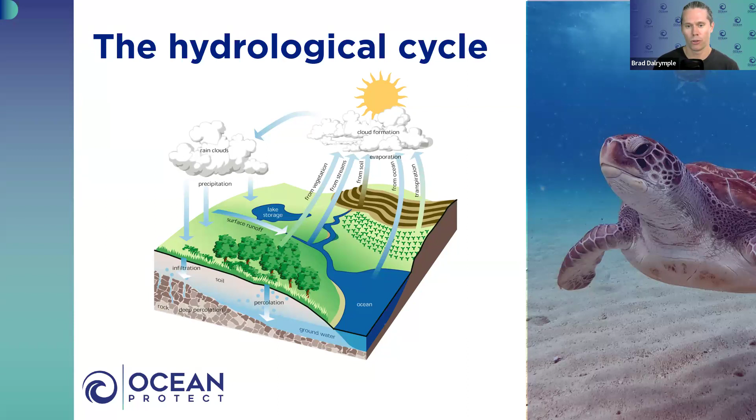And also in a forested catchment, we don't actually get much in the way of surface runoff. We need a lot of rainfall to generate any surface runoff in a forested environment, which is very different to urban areas. And I'll come to that very shortly. But obviously, depending on where you are in a catchment, the waterway will often be different. So in the upper reaches of the catchment, we have gullies and small creeks, etc. And towards the end of the catchment, we have obviously estuaries and marine environments, and they operate very differently.

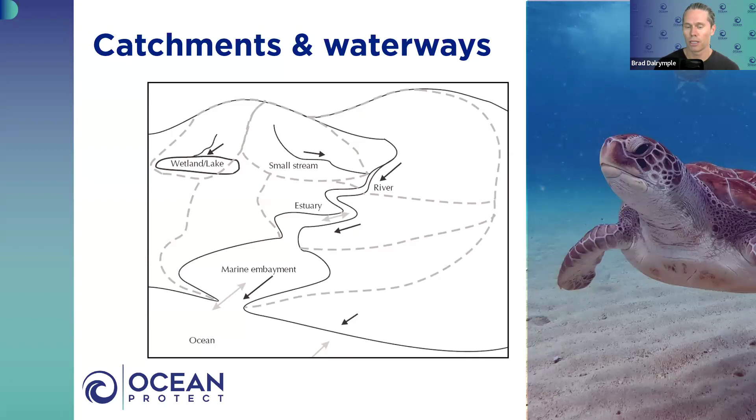Smaller creeks with smaller catchments are obviously far more sensitive to any sort of change. But the downstream environments near estuaries, etc., have what we call tidal flushing, or essentially are a lot less susceptible or a lot less sensitive to land use change.

To give you an idea, this is a model result infographic from my old employer, BMT WBM, back in the day. This is going back a few years now. It basically shows a sediment plume coming from a large catchment in southeast Queensland and entering into the downstream bay environment. And you can see the brown, which is the sediment plume coming from the catchment.

You can see the upper waterways, obviously much more sensitive, that you get a spike of turbidity in this case, but the estuarine environment has what we call tidal flushing, so the action of the tide going up and down basically acts to flush a lot of that pollution out of the system, typically replacing that potentially contaminated water with cleaner water.

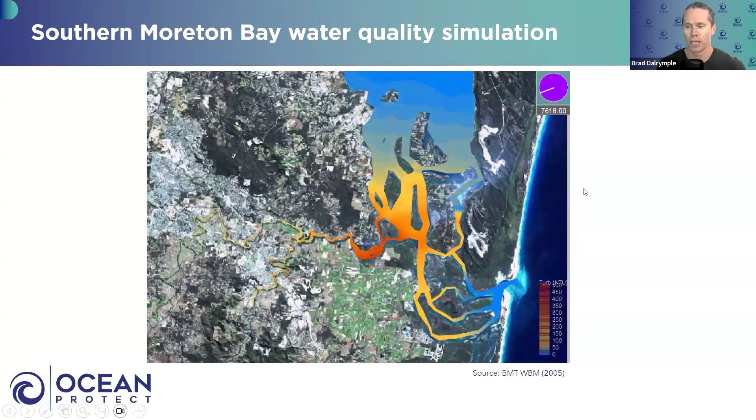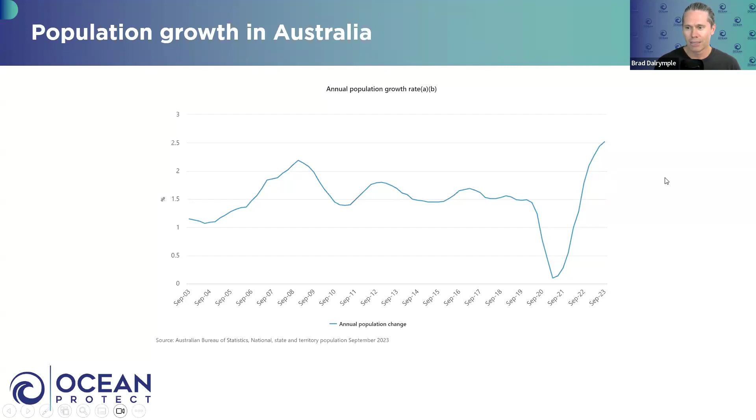So diving straight into it, let's talk about urbanisation. So fundamentally, we've got a lot of people coming to Australia, and why not? It's a beautiful part of the world. But the population growth is pretty significant. What's that, about 1.5%, 2.5% per year? Obviously, COVID was a little bit of an exception, but we've got a lot of people coming to Australia, particularly in certain parts of Australia. So where I'm based in southeast Queensland, a lot of people are coming to southeast Queensland.

So that urbanisation, okay, it's happening. So what are the key catchment or land usage changes associated with that urbanisation? For me, these are the key ones: vegetation loss, increased imperviousness, increased hydraulic efficiency, and pollution.

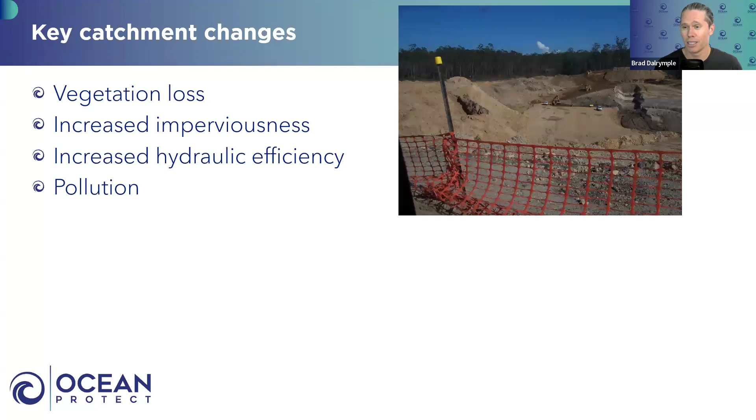So these are some happy snaps taken over the years. The top photo shows basically land being cleared. This is out at Springfield Lakes, probably a decade or so ago now, at least. And that's basically being progressively built out with a whole bunch of roads, houses, etc., which obviously changes the dynamics of the catchment hydrology.

And also something that's often forgotten about. Often we can't do much readily, or at least practically, when it comes to decreasing imperviousness. But certainly one of the things that we do see with urban environments, at least traditionally, is this increased hydraulic efficiency. So there's a real desire or objective to just get stormwater away as quickly and efficiently as possible. I'll come to that a little bit later.

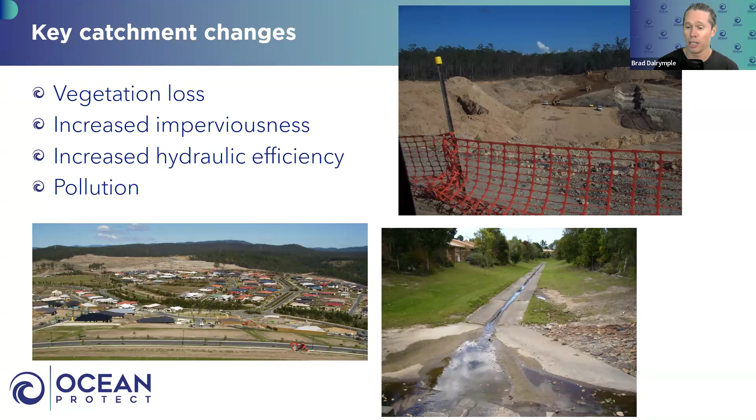And also we get increased pollutant loads, higher concentrations of pollutants, but also pollutants that just wouldn't otherwise appear in a natural catchment. Very quickly on these impervious areas, the key ones are roofs, roads, driveways, etc. Particularly roads. Roads are a major part of the imperviousness of a catchment. You can see here, back in the day, and I think it's probably worse now, some areas have up to 70% of the impervious areas of an urban environment dedicated to just cars, basically.

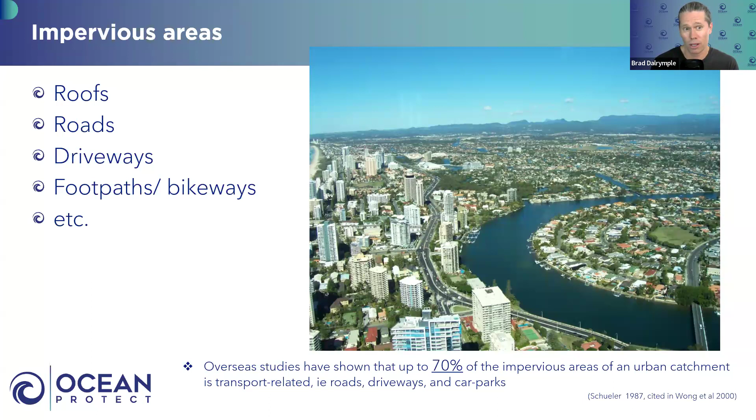So we're a long way off flying cars, but in the meantime, we've got a massive issue with increased imperviousness. What does that actually mean, though, that increased imperviousness and vegetation loss? Fundamentally, from a hydrological perspective, and that's what we're here to talk about when it comes to stormwater, we see reduced rainfall interception, reduced runoff interception, reduced infiltration, so less water soaking into the ground, more runoff being generated. And generally, runoff is transported much more quickly and more intensely into our waterways.

But fundamentally, you don't need much rainfall in an urban environment to generate runoff. You generally need at least 25 mils or thereabouts to generate any surface runoff in a forested environment. But when it comes to an urban environment, you only need 1 or 2 millimeters to start generating runoff. So fundamentally, we see more volume and more frequent runoff events in an urbanized environment relative to a forested environment.

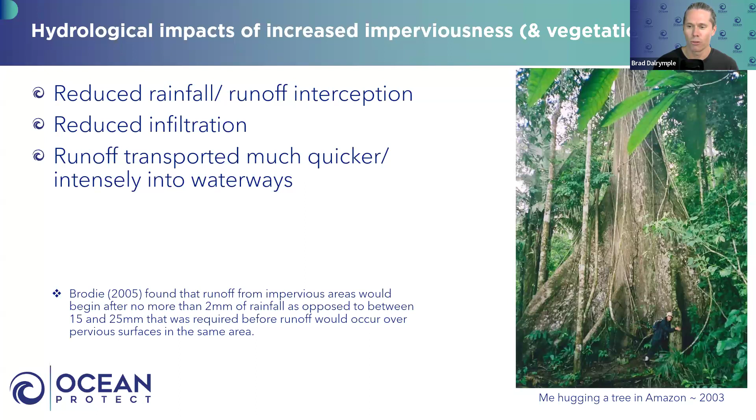So let's talk about that now. I'm keen to talk about water quantity now. So stormwater quantity, and very quickly talking about the elements of the traditional stormwater management system. Traditionally, stormwater engineers have been all about trying to get that stormwater away as quickly and efficiently as possible, generally focused very much on flood protection. So protecting people and property from big events, the Q100 events, the Q50, Q20, stuff that can cause some dramas.

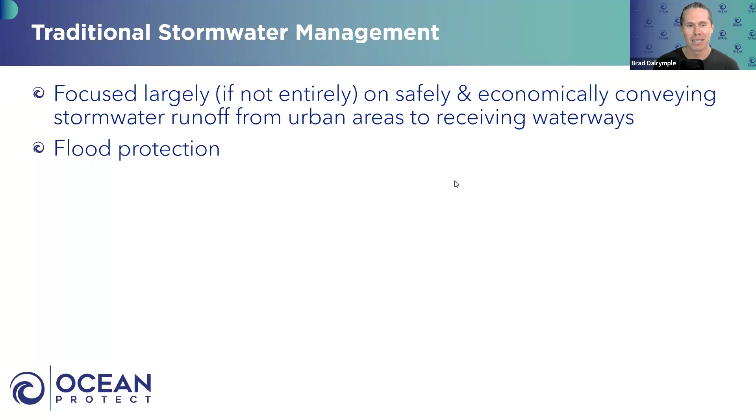But fundamentally in Australia, we generally have what are considered, in inverted commas, separate stormwater and wastewater. So our wastewater system or sewage infrastructure is handling the toilets, the bathrooms, kitchen sinks, laundry, etc., and there's a separate set of pipes for stormwater runoff. And I use that term separate in inverted commas, because often there's cross contamination. Often stormwater will discharge or leak or infiltrate into wastewater. Equally, wastewater can often go into stormwater, whether it be through illegal connections or whatever, so often they aren't necessarily separate as such.

It's a bit different in other parts of the world, including the UK. When I was in the UK as a sewage engineer back in the day, one of my jobs was to investigate sewage flooding into people's houses. In the UK, they often have cellars and other low-lying buildings. And because they've got this combined system, if the sewage has got nowhere to go in a storm event, it'll rise up into people's properties, which is a whole bunch of drama. And that's a story for another day.

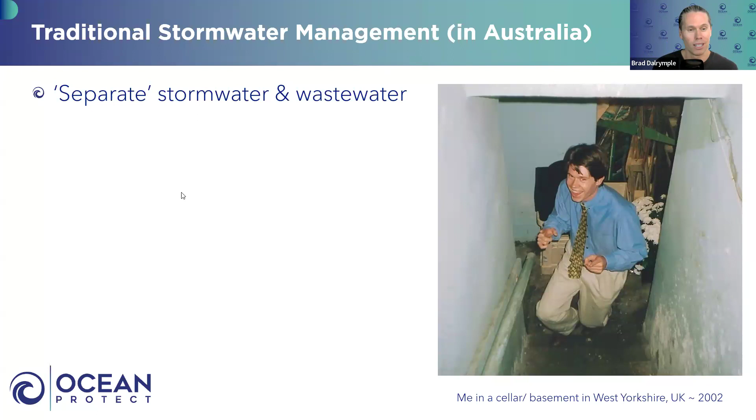But yeah, typical elements of a traditional stormwater management system are really just about getting that water away as quickly as possible. So kerb-side channels and pits, pipes, which I know Sean Quilty has done 3 webinars on as part of this fundamental series already. And then open channels, whether they're overland flows or big concrete drains, and often detention basins to try and handle or detain those big infrequent Q50, Q100 storm events. So most of the elements are about getting the water away from people and property as quickly and efficiently as possible.

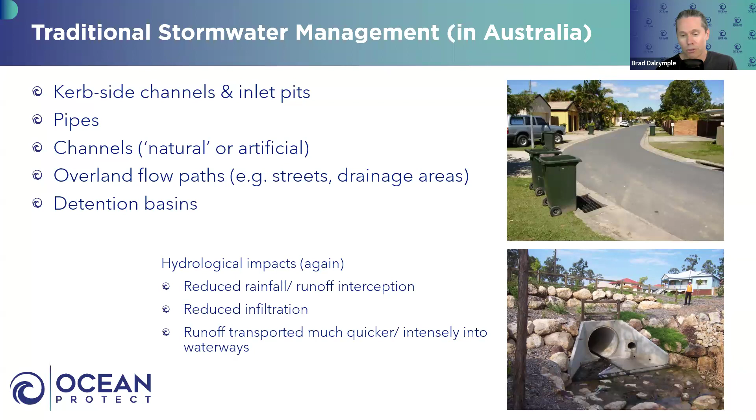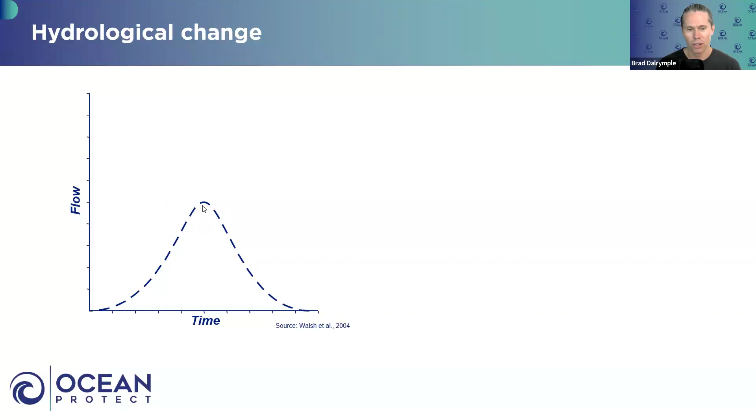So again, the hydrological impacts of that are more or less the same as getting rid of trees and putting down imperviousness. Reduced rainfall runoff and interception, reduced infiltration, and again, water's got a lot more energy going into our waterways. And you've probably seen a graph like this before. I won't dwell on it too much, but you've got a relationship here between flow and time. After a rainfall event, you might get a peak of the flow here, and this might be, say, before urbanisation.

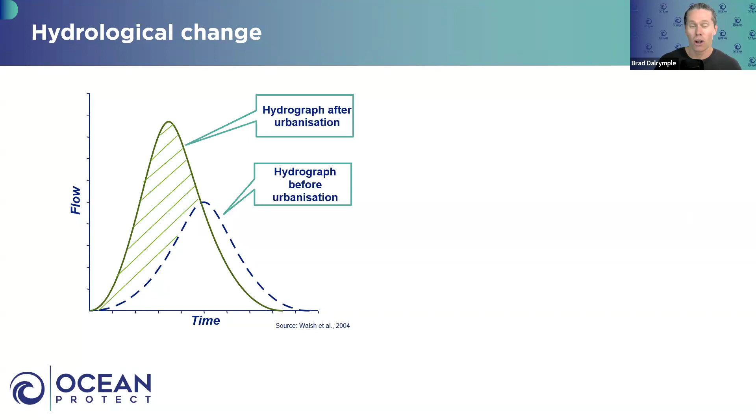But when you urbanize a catchment, it very much changes the hydrograph for any particular rainfall event. Generally, you get a higher peak flow rate. So the peak here is much higher than the peak for pre-urbanisation. Also, the hydrograph peak actually occurs sooner. You can see here the time it takes to get to this peak post-urbanization is much faster because of that increased imperviousness, hydraulic efficiency, etc.

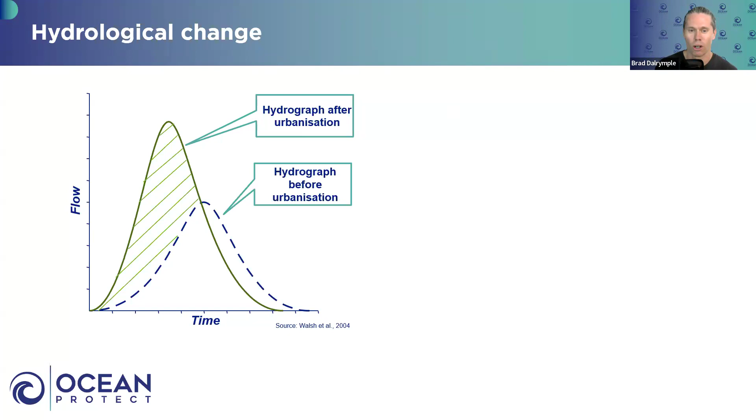And also the volume of runoff. The volume of flow, the area underneath the graph, is obviously bigger post-urbanization. And imagine that is the case every time it rains. So again, decreased time to peak flow, increased flow rate, and also increased flow volume, which obviously has big impacts on the health of our waterways.

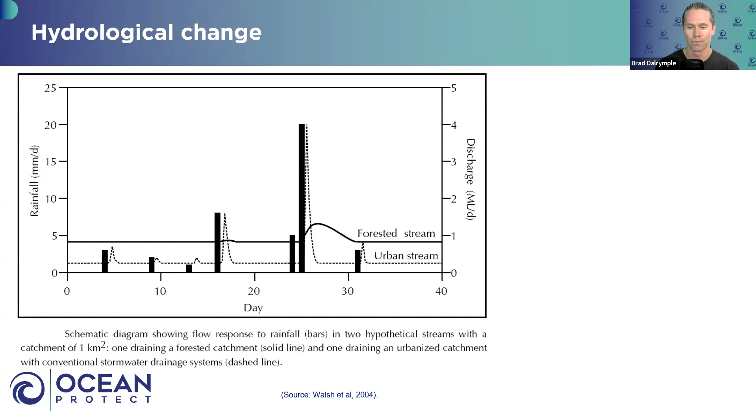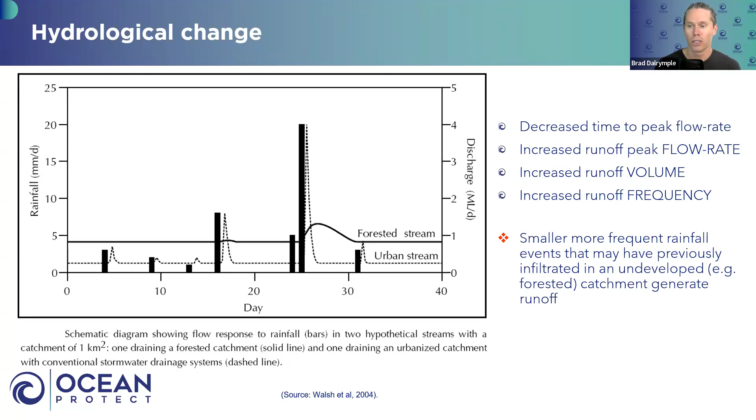So again, key changes illustrated here: with urbanization, you get decreased time to peak flow, increased peak flow rate, increased flow volume, and increased runoff frequency, particularly for the smaller, more frequent rainfall events that previously caused no runoff in a forested environment. And that, for me, is key. I'll get to that shortly.

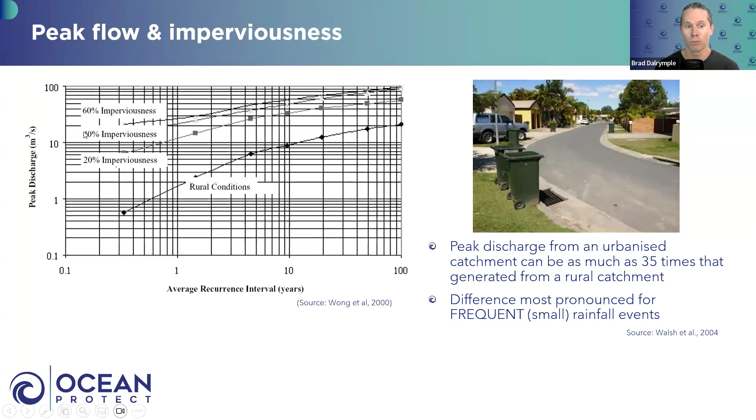This is a bit of a complicated graph. It basically just shows that the impact to peak flow rates is far more severe when it comes to imperviousness for the smaller, more frequent rainfall events. For the big events, the Q100s, the Q50s, yeah, there is a change between impervious versus non-impervious, but the bigger change between flow rates is observed in the smaller, more frequent rainfall events.

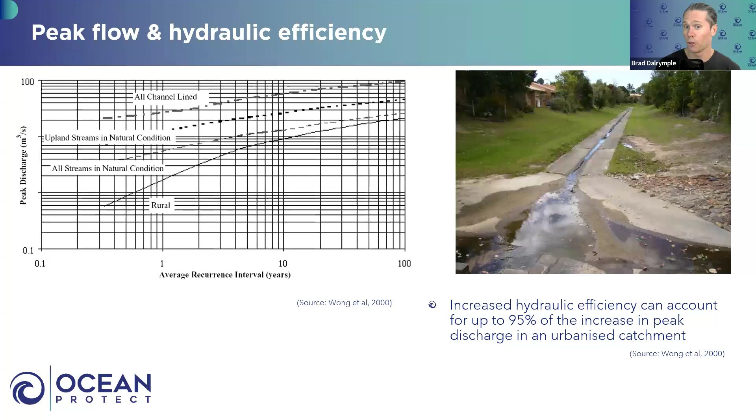So that's water quantity; crash course in water quality now. So stormwater becomes polluted, basically. There's a bunch of processes, but fundamentally you get a buildup of pollution, and when rain falls, it often just washes that pollution off. There's a whole bunch of things going on here, but you can get deposition from the atmosphere. You can get pollution being generated or blown by wind, or people accidentally or deliberately putting the pollution there. And there's a whole bunch of variables there.

And again, on wash off, rain falls, it can often wash contamination even out of the atmosphere, but also it can wash off that pollution from ground surfaces into downstream waterways, or into the stormwater at least. And we often try and simplify this with our fancy modeling packages. It's very much a simplification, but you generally see some sort of first flush happening. So the higher pollutant concentrations being generated in the early stages of a flow event or a rainfall event. Now, we try and simplify that with our models by using event mean concentrations, but fundamentally, we do see a first flush effect, at least on a small scale.

When you look at a catchment or a waterway at a large scale, often first flushes from one part of the catchment will be diluted by other flow from other parts of the catchment. But certainly, the closer you are to the source of pollution being generated, you do see this increase in pollutant concentrations in the early stages of a storm event, which again, for me, highlights the fact that we really should be targeting pollution treatment or mitigation at the source as a priority, which is often forgotten about.

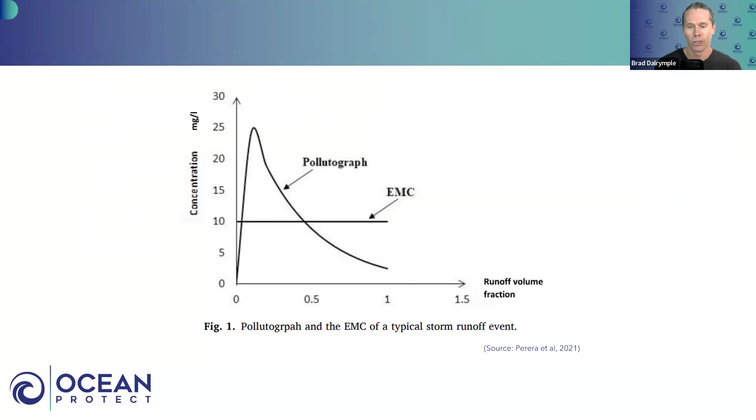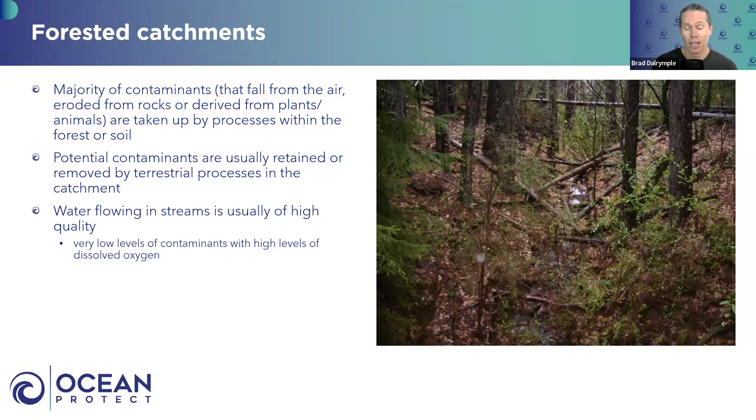But yeah, look, talking about forested catchments again, in forested catchments the waterways are generally pretty healthy. So most of any pollution or contamination that might be generated or accumulated in the forest is generally retained within the forest. So water quality in forested waterways is generally pretty good. Generally low levels of contamination and high levels of dissolved oxygen.

Urbanisation, though, very much changes that. We see an increase in the amount of contamination. Not to say forested catchments are free of contamination, but we certainly see an increase in contamination generally in urbanized environments, but also urban development or just basically people and property in general. We introduce a whole bunch of potentially toxic contaminants that just wouldn't appear in a forested environment, like Big Mac wrappers and single-use bottles and cigarette butts. No koalas are hanging in the eucalyptus trees, smoking any durries. But yeah, certainly urbanisation changes that.

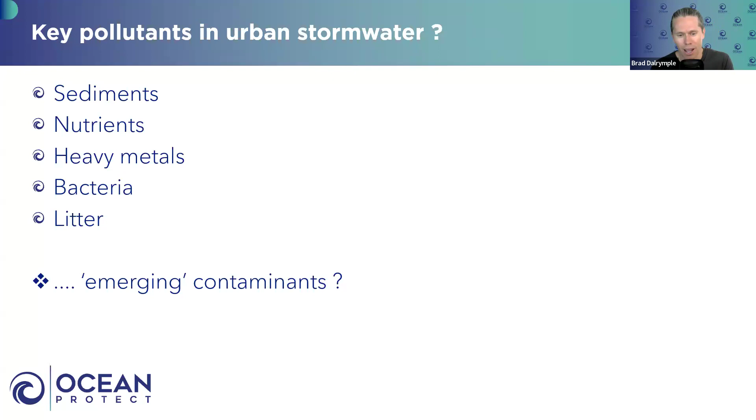These are the key pollutants that we generally talk about when it comes to urban stormwater. So sediments, nutrients, heavy metals, bacteria, litter, etc. And I'm gonna touch on those briefly now, but I'm going to talk about emerging contaminants as well.

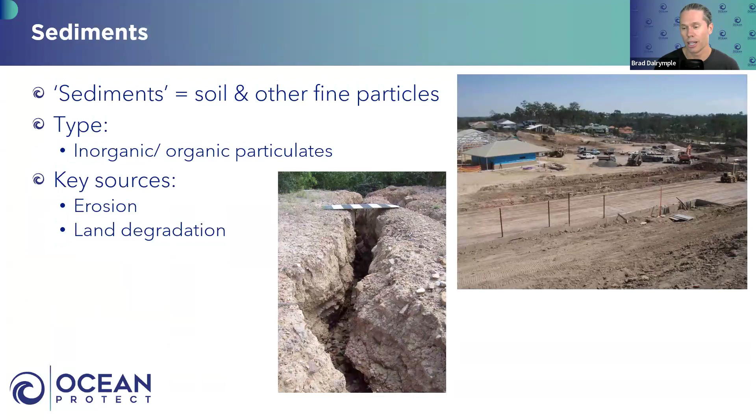40% of construction sites are still non-compliant, i.e. operating illegally when it comes to just basic erosion sediment control practices. And as a result, we see a lot of mud going into our waterways. But like I said, even in an urban environment, you still get a lot of solids, particulate matter being generated and high concentrations in urban stormwater runoff.

Nutrients, generally we're talking about nitrogen and phosphorus, and this comes from a whole bunch of sources. Again, dirt, so you get a lot of particulate bound nutrients in addition to dissolved. But yeah, roads, sewage, detergents, fertilizers, etc. They're all key sources of nutrients. Rainfall is a key source of nitrogen as well. Why? Because there's a lot of nitrogen in our atmosphere.

Now that nitrogen, if it comes to the ground through rainfall, acting like a big scrubber, in a forested environment, that nitrogen will be taken up by the processes in the forest, which is great. But in an urban environment, that nitrogen can often just wash straight into our creeks and rivers, etc. And that direct connection between hard stand area and waterway is when it becomes a real key pollutant of concern.

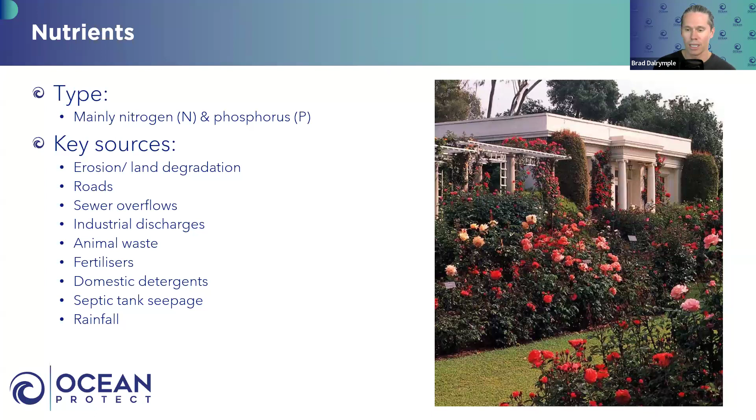Heavy metals, yeah, cadmium, chromium, nickel, lead, zinc, etc. Again, the typical sources. Generally, when you've got dirt, you've got other attached pollutants, including heavy metals. Obviously, roads and roofs are a key source as well, zinc roofs, etc. And then you've got bacteria, so basically poo, whether it's from animals like domestic pets or just birds, etc. And like I said before, you often have sewage somehow infiltrating or leaking or connecting into stormwater as well.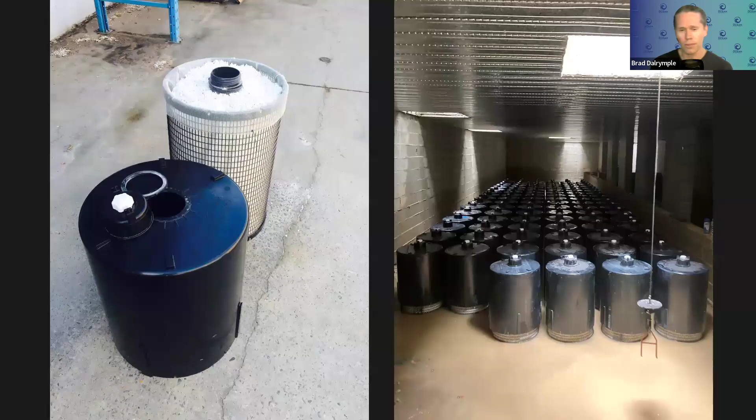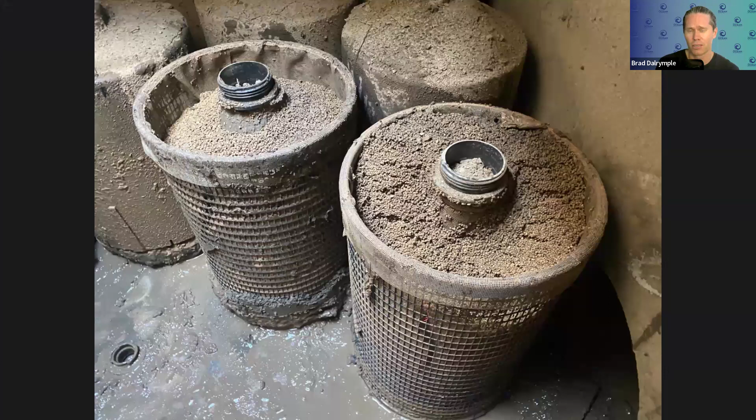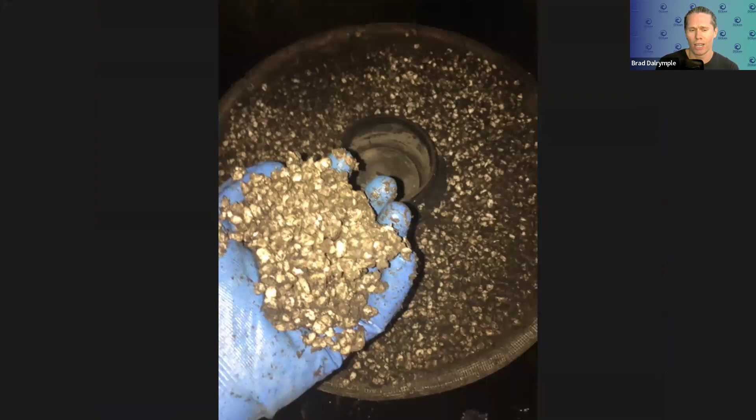Give you an idea again, snapshot. These are some clean StormFilter cartridges. This is kind of what they look like on the right hand side, what they look like after being in the ground for 2 or 3 years. It's gross. This is what is in stormwater. These filters are filtering stormwater, and what we pick up out of these devices is gross. And you do not want to have this in your downstream waterway, ideally.

So again, we've got lots of photos of this sort of stuff. These are some clean Jellyfish units. These are like a membrane cartridge filtration system going in, brand new. And this is kind of what they look like when they're pulled out of the ground. It's gross. So stormwater can be really high in pollutant concentrations. Got lots of photos like this. Fundamentally, stormwater is polluted and you don't want it in your waterways.

eWater's got a fancy modeling software, which I guess many of you are familiar with, that actually models these common pollutants, at least in terms of TSS, TN, TP, and gross pollutants. It's not ideal, but it's probably the best tool that we have available to do that. I'm going to touch very quickly on emerging contaminants, and this is probably a session in itself, but for me, these are probably 2 contaminants that don't get nearly enough attention, at least from the stormwater industry. Microplastics.

Microplastics are present in stormwater at very high concentrations, and the science is growing, but it's very new. But it's pretty clear microplastics are causing human health harm. There was a study in 2019, just 5 years ago, that found it in poo, and then they found it in the placentas of babies, and then in blood and all our vital organs, including our brain. And now the more recent science shows that it's causing human health dramas: increased cancer growth and increased risk of heart disease and stroke. So fundamentally, particularly in relation to microplastics, stormwater is a human health problem.

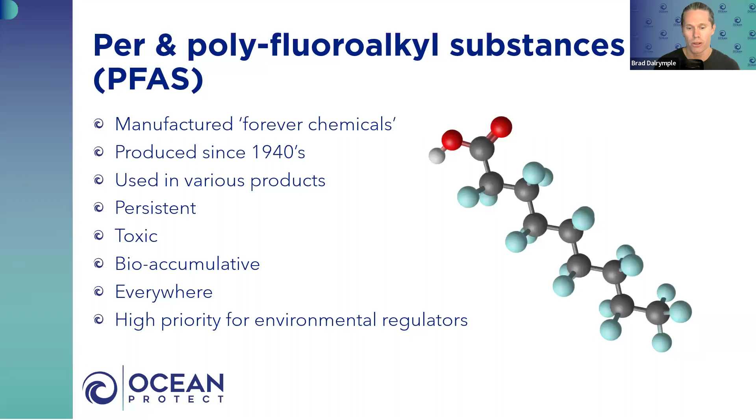Full disclosure, Ocean Protect do have a device that removes it, but it's a massive problem worldwide, and it's shown to bioaccumulate, particularly in your fatty tissue or fatty organs, and it's considered a potential carcinogen. So it's a very, very high priority for environmental regulators. And it's got a lot of media attention.

Literally 2 or 3 days ago, Stan released their How to Poison a Planet documentary, which talks about PFAS. There's books, there's movies starring Mark Ruffalo, and a whole bunch of lawsuits, media reports, etc. Australian Story did a story on the Williamtown community suffering from the ill effects of PFAS. But it's a major problem, and it's in stormwater. So look, major concern.

So getting back to just pollution in general. So yeah, increased pollutant loads in the catchment from urbanisation, but also with urbanisation, we get increased flows from the catchment to our waterways, which subsequently means we get more pollution going into our waterways. Pretty simple equation, but what are the impacts? Let's talk about them now.

So generally, if I look at just the general categories of impacts, it's basically 4 things: flooding, channel form, water quality, and the subsequent ecological impacts. So let's talk about flooding first. Generally, I'd suggest most of the time we've got this covered. For a long time, urban development has had to demonstrate a no worsening in peak flow rates for large rainfall events. Q50s, Q100s generally, sometimes Q20s, Q10s, Q5. And generally that means some sort of detention basin or some sort of detention is required.

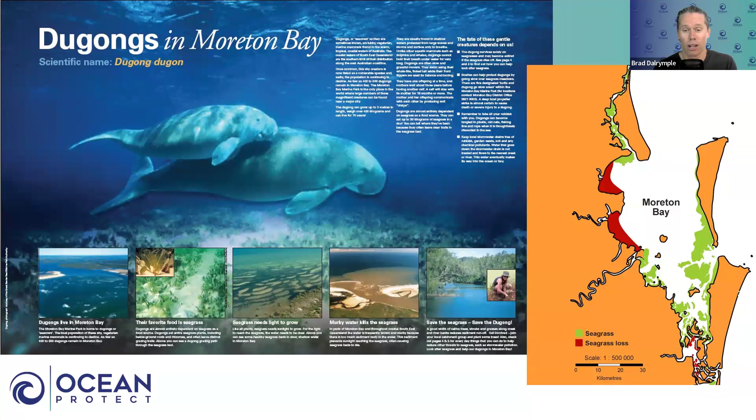In southeast Queensland, we're losing a lot of our dugong because mud is basically covering their seagrass meadows. Sediment, it's pretty obvious that the key impacts are that increased turbidity, turbidity being a measure of light penetration through the water column. So, reduced photosynthesis, reduced aquatic growth, biodiversity. Obviously, it looks ugly. It smothers aquatic habitat. It blocks our drainage systems. And then we have all the other impacts associated with the contaminants associated with the sediment: the nutrients, the organic matter, the heavy metals, hydrocarbons, etc.

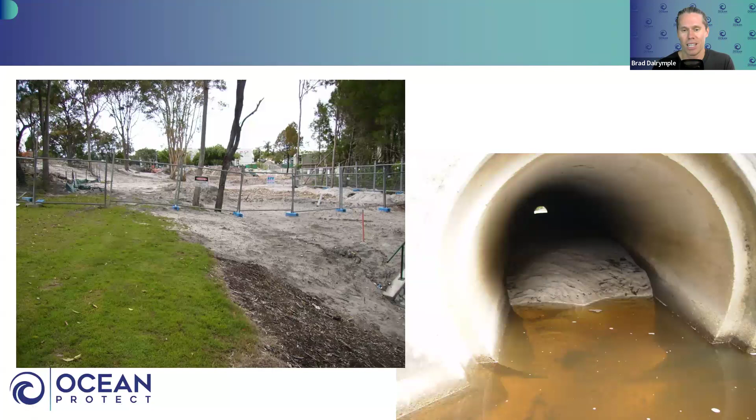And look, this is a classic example. This is the construction of the J behind Noosa Junction, if you know where that is, probably about 15 years ago or something. This is a council project, no erosion sediment control. Downstream pipe, this is one of two, about 1,500 millimeter diameter pipes, completely chockers with sediment. So you can see it's not just an ecosystem or an aesthetic issue. It's blocking drainage systems, which obviously causes flooding, etc.

Nutrients. A lot of people wonder why are we stopping nutrients into our waterways? The key risk is eutrophication. So nutrients increase, I guess, the risk of algae growth. And algae is a plant. It's probably a good thing. It produces oxygen, photosynthesis, et cetera. But the big drama with algae was two things. Number one, when algae dies, the bacteria within the water column eat the algae and subsequently eat a lot of oxygen. And that's when you can often see a major decline in oxygen levels in waterways.

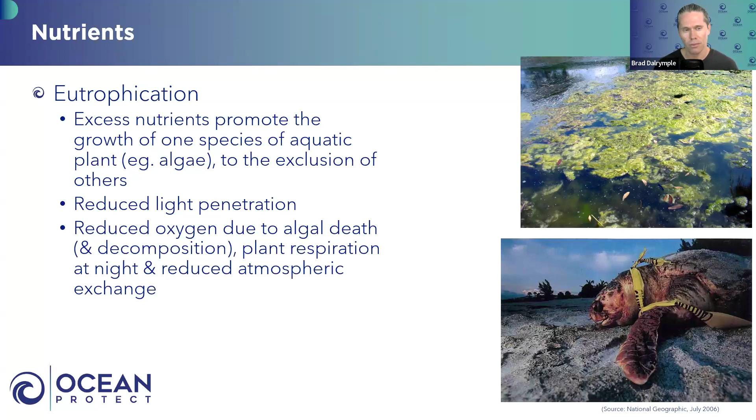And a whole bunch of other urban ponds, waterways, etc., that have had algae issues because of increased concentrations of nutrients. And then you've got a whole bunch of water quality impacts associated with heavy metals. They're generally acute or chronic. Bacteria obviously have disease and death outcomes. And litter, I won't talk about this because you've probably seen 1,000 images of turtles with straws up their nose and albatrosses full of plastic, etc. But fundamentally, litter is horrendous to our ecosystems. So the water quality impacts are basically this: toxicity, reduced oxygen levels, disease stress, aesthetics, and blockage of drainage systems.

What does that mean to our ecology? It's staggering. It is severe and predictable, the ecological impacts associated with our urbanisation. And there's even a term used to describe them, called urban stream syndrome. Urban stream syndrome basically has the symptoms I've just talked about: the hydrology changes, the decreased low flow volume, increased frequency of flows, decreased base flow, etc. The eroded, scoured, and incised channels, the poor water quality, and the low ecological values.

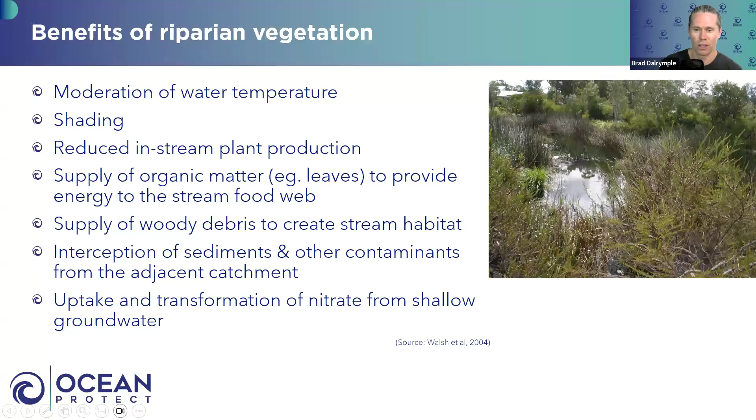Ian Everest asks, how do you clean the cartridges? Yeah, pretty simple. It's like a swap, and just to clarify, I think he's talking about StormFilter cartridges. So these are StormFilter cartridges we put in the ground, and after generally between 1 to 3 years, we replace the cartridges. We just basically pull these cartridges out and replace them with new ones. The analogy we talk about is like a gas bottle swap and go system. Take old ones out, put new ones in.

We take them back to our facilities in Sydney or Melbourne or Loganholme, and we basically repurpose everything. So the components, the hood, the cage, etc. And the filter media itself is pretty often manky. We can't use that again. So depending on where you are in Australia, it'll either go to landfill or be repurposed in a recycling facility. So hopefully that answers your question, Ian.

Ramesh Gimia, apologies if I've mispronounced that. How could we reduce the impact of downstream, mostly erosion, with small regular events? It's pretty simple, actually, Ramesh. We just got to reduce the frequency and volume of flow. Now, that could be rainwater tanks, interception, stormwater harvesting, promoting infiltration. So even in a StormFilter environment, we can have some sort of arrangement where we can soak water into the underlying ground if the soil conditions permit.

So there's a lot of ways we can reduce the frequency and volume of stormwater runoff being generated and discharged from your site. And obviously, going back a little bit before that, is trying to minimize the generation of runoff. You know, maybe more trees, green roofs, less imperviousness, porous pavement, whatever.

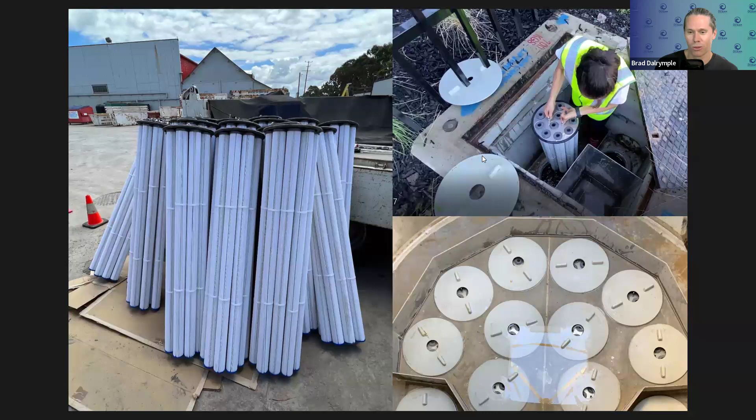Some of the pollution I've seen, to give you an example, this site, for example, is from a shopping centre car park in Adelaide. So yeah, pretty gross. I can't remember where these ones were from. These are, I think, probably some sort of commercial industrial site. Yeah, so where you've got heavy machinery, some industrial commercial activity, I think that's probably the worst.

But certainly roads are terrible. I think roads are just shocking in terms of pollution being generated. And as we've discussed before, Katie, we probably need to be doing a better job of trying to reduce pollutant loads coming from our road projects. So hopefully that answers your question, Katie.

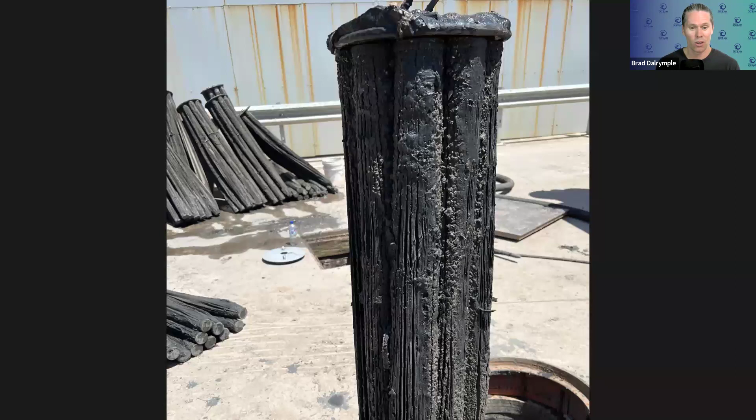Nicola Sainsbury asks, how is the contaminants management cleaning the cartridge? I think I answered that before, so hopefully that answers your question, Nicola. What do you do with the polluted gully pit filters and the longer filters? So I talked about the filters, the gully pits, these ones. I'll just backtrack a little bit.

Sorry. These things, we basically just lift the gully pit basket out and empty the contents, and that goes to landfill or whatever. The gully pits themselves are just reused. Sometimes they can get damaged, particularly with cigarette butts. If there's a lit cigarette butt, it can burn a hole in the gully pit filter bag, but generally they can be used for a fairly long time, again and again and again.

Yelena Shrep asks, will you be mentioning the effects of animal agriculture? Oh, Yelena, sorry, she asks, will you be mentioning the effects of animal agriculture and the benefits of plant-based diet as a measure of improving stormwater quality in general?

Oh, Yelena, I'd love to, but I probably should keep on track. But thanks for the reminder. Yeah, great way to protect our environment is to shift towards a more plant-rich diet for sure. Thank you, Yelena. That's made my day.

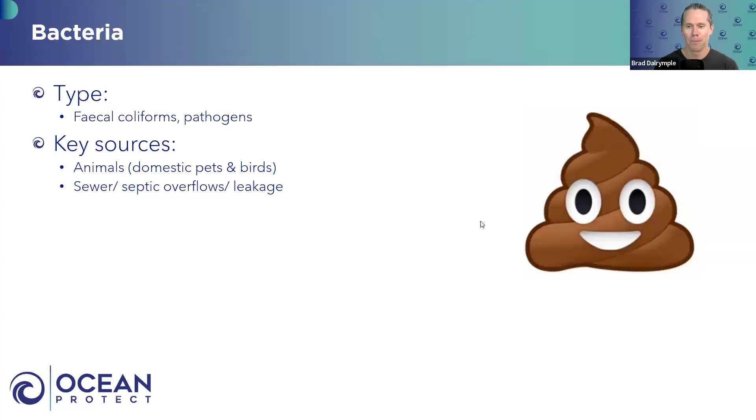Jeffrey Harris from Fraser Coast Regional Council says, is there any information on the effectiveness, longevity, and the cost of filter tubes that you showed, quantitatively versus a percentage of contaminants? Oh, yeah. So it might be a conversation we have offline, Jeff, but look, we've got performance monitoring data for all our key devices, so Stormfilter, OceanGuard, Jellyfish, Filterra. There's about, off the top of my head, about 7 real-world performance monitoring studies for this. And also longevity studies as well.

So, for example, Stormfilter, an independent consultant, Renew Solutions, took a whole bunch of our storm filters that have been in the ground for about 2 to 3 years and checked to see if they were still working okay, and the flow rate was consistent with our design treatment flow rate. Long story short, it was, but I can send you a link to that study as well. It's just on our website, oceanprotect.com.au/stormfilter under the review paper. But yeah, again, just hit me up if you want a link to that report.

Phil Salem asks, what about golf courses for generating pollutants? Yeah, look, it's an interesting space. I've had a few chats with various golf course operators in the past about this issue. And some golf course managers will say, "Oh, look, no golf course manager would use any excessive nutrients because it just basically costs them money, and they definitely don't want to have nutrients leaving their site. So they do try and recycle a lot of water within their own boundary."

But I think I'd be particularly concerned around pesticide application on golf courses. One emerging contaminant I didn't talk about today, and when I say emerging, it's been around for a long time, is pesticides. And I think that is a key pollutant that does not get enough attention. It's being used in enormous quantities in our urban environments and draining into our urban waterways.

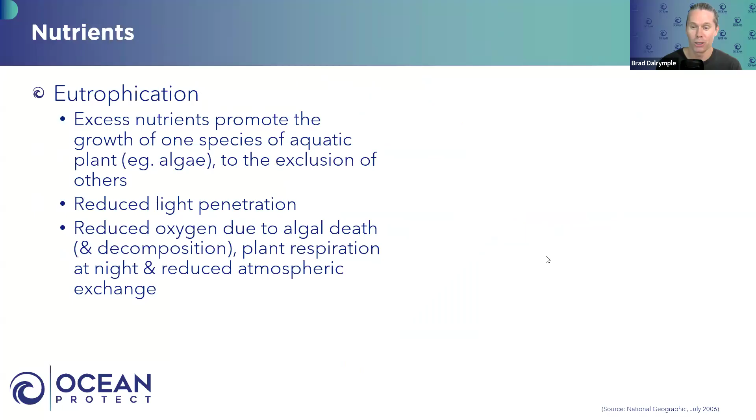So I know it's a bit of an unusual thing for a stormwater professional to get on TikTok or Instagram or whatever, but I think maybe we should be doing that. And certainly there's opportunities to increase media attention on this issue as well, whether it be writing opinion pieces for news outlets, approaching TV, etc. It certainly has worked for other subject matters, so I don't see why it wouldn't be effective for stormwater.

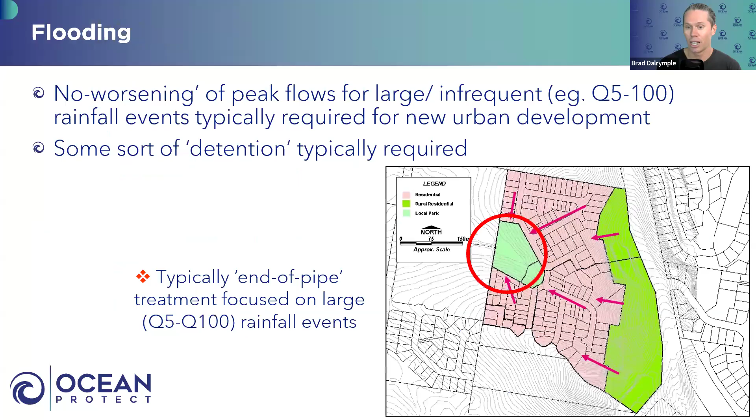Why aren't centrifugal separators utilised as a coarse separator before filter? This would be better for maintenance to remove particulate, for filter longevity, larger particles, and also attract micro contaminants. So when Bo's talking about centrifugal separators, he's talking about continuous deflective separation units, like CDS type technologies. Full disclosure, Ocean Protect do our own version of that centrifugal type of GPT.

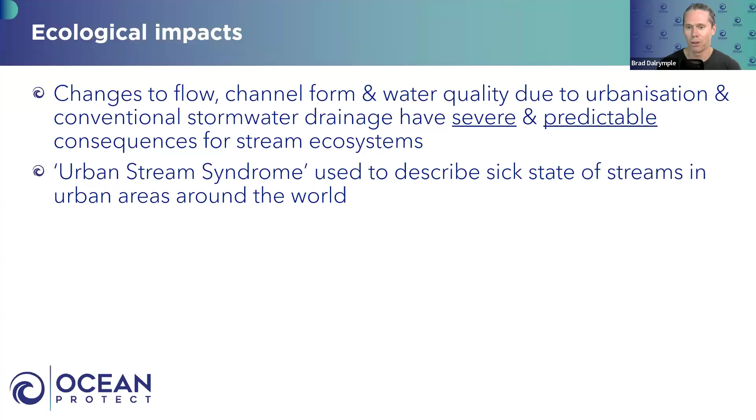I'm just trying to find a picture. Sorry, I'll find it somewhere. Apologies if everyone's losing their mind. I won't try and find it.

But look, so should we have pre-treatment upstream of filters? Absolutely.

So for our storm filters, for our jellyfish, etc., we always recommend some sort of pre-treatment upstream. But I'd also suggest we should be doing pre-treatment upstream of vegetated systems as well, particularly wetlands and bioretention systems, or big bioretention systems. And I'm always staggered that this isn't standard practice.

We're releasing a podcast with Murray Powell about this topic exactly on Monday. And to quote Murray, he says, anyone who doesn't use GPTs upstream of a wetland is an idiot.

And I think we should certainly be going back to first principles when it comes to stormwater treatment and thinking more about a stormwater treatment train, as opposed to relying on a single device like a bioretention system, thinking that it would just magically remove all pollution and still work fine.

Cool. Thanks for the question, though, Bo. Hopefully that answered your question.

Mohammed asks, how can we control carbon footprint in urban stormwater management? Is there any more efficient method rather than traditional methods? Yeah, look, certainly minimizing the use of concrete will go a long way. Certainly reducing the componentry of devices will go further. But fundamentally, stormwater treatment devices, their primary purpose is water quality or stormwater management, and they should be working.